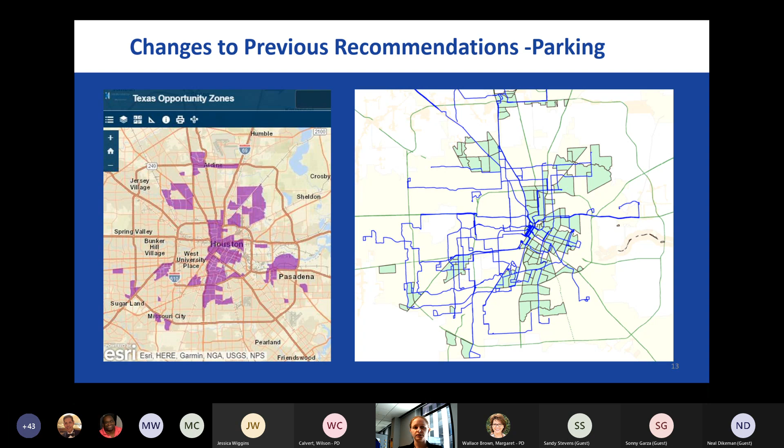The final proposed recommendation change is a result of last month's discussion on narrow lot developments. For lots less than 40 feet wide, instead of the property size threshold being less than 15,000 square feet and then 15,000 square feet or greater, we recommend changing that to be 15,000 square feet or less and then greater than 15,000 square feet.

Are there any questions before we move to a new topic? Right, so subcommittee, are there questions? Lisa, did you have your hand up?

I did, but it was for a previous topic, so. That's perfectly fine. Yes, no, okay, wasn't that important. Thank you, I apologize, I didn't see your hand raised. So if you want, you can send me an email or we can chat about it if you still have the question. Okay, thanks, all right, great. Thank you, again, apologies, I didn't see your hand up.

All right, again subcommittee members, are there any questions on what you've seen so far? Again, all of this has been presented to you and actually was done based on your recommendations. And as you can see, they are, and I think Tammy, you'll agree, they're mostly technical and verbiage more than anything else.

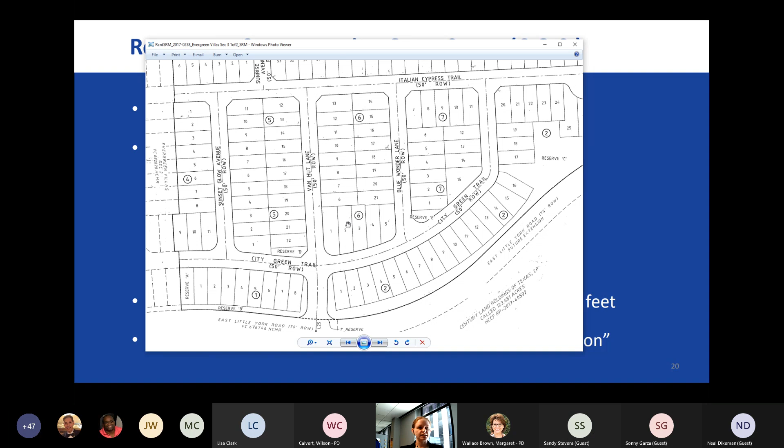So there are ways to incorporate it within the plat. It's just designing it. Does that make sense?

It does. I guess I'm concerned that it sounds like the fix you're describing may make them have to do it twice if they still need that buffer for that type of lot, and is not just switching it from point A to point B, but might increase or reduce the density effectively for what sounds like just bad design choices.

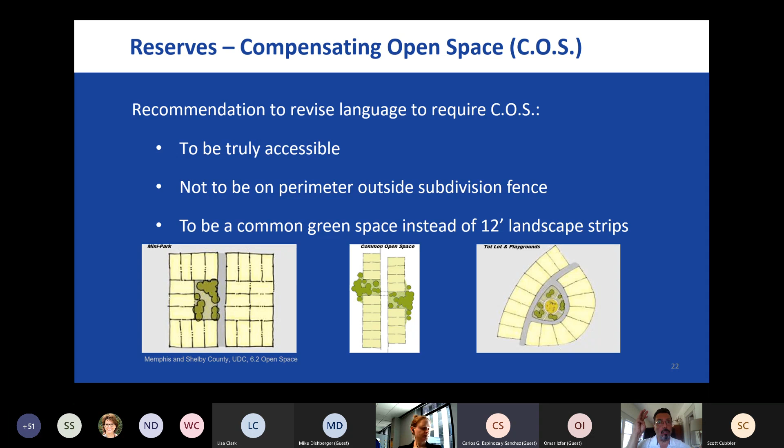All right, so my question is, for that slide where we see the exterior strip and there's no amenities whatsoever—do we marry those two things together? They're not currently married together, but do we marry those two things together?

So let me go ahead and call Neal—his hand is up again, and we'll start our discussion. Neal, go right ahead, sir. So I'd really like to understand what problem we're trying to solve with this adjustment.

It seems to me that if you're trying to create a community integrated to itself, it'd be great to have this compensating open space on the interior. If you're trying to either buffer communities and create communities within communities, or integrate communities together, then it would be great to have the open space on the exterior. I'm not sure why we should be trying to legislate that, unless there's a specific issue you're trying to address with this rule change, or is this just thinking through what might be good? Tammy, I know you have an answer for that.

So we're trying to get back to the intent of COS. When you're reducing your lot size, you're taking away green space from a single resident, and so to compensate, you provide a common green space that can be used in lieu of having that space on your own lot. It's compensating for the open space that should have been on the lot — not that it should have been there, but that to reduce your lot size without restricting density, you now potentially have less yard space personally. So you're providing it within the public space for that subdivision to compensate. It should be truly usable green space for residents with reduced lot size, not just a landscape buffer. Landscape buffers are absolutely fine if that's the design intent, but that's not the intent of COS. Does that make sense, Neal?

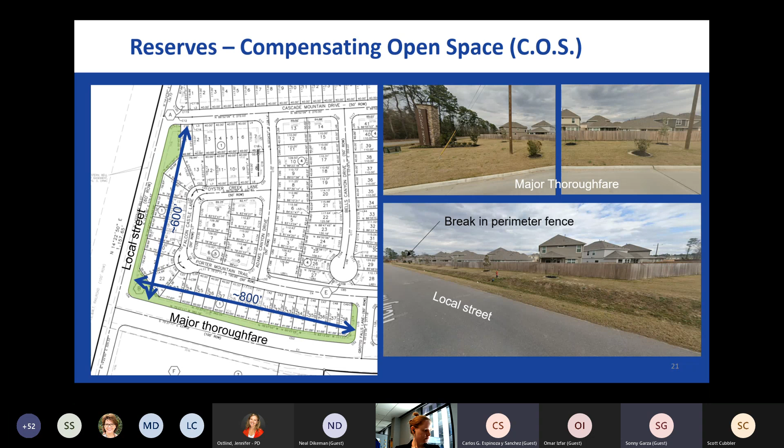There's a good conversation happening here. I wanted to pitch in about the reasoning this is on the discussion list today. COS, compensating open space, is an option for reduction in lot sizes, and as Tammy explained, it is allowed in the city limits and in the ETJ.

But in the city limits you have an option to do density, so most often we don't see the use of COS there. We do see the use of COS outside the city limits in the ETJ, where the option of density is not available. The intent of the ordinance was to provide a common open space which was to remain dry and flat and be used by the entire subdivision being created.

We have seen multiple variances at the Planning Commission regarding the accessibility of COS. So what Omar just mentioned, I think for us at the end of the day, we need to write some standards—maybe distance requirements and minimum size requirements. The size requirement is there, but maybe we can get better at it, and the distance requirement is important because we've seen multiple variances at the Planning Commission, which is why this is on the list—it should be located where it is reasonably accessible.

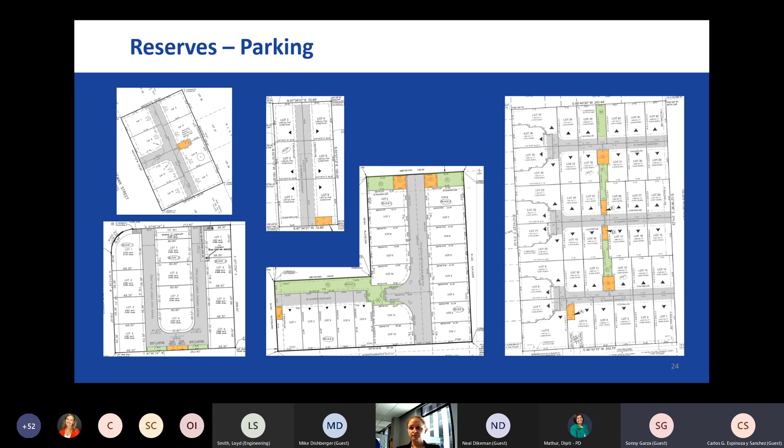All right, anyone else? All right, Tammy, you have your marching orders. Okay, the next section then. The last reserve type was the parking. Yes, this was for 6 units and more, where the ordinance currently requires that they provide parking, and the question is where is it. So you were saying X amount of distance from the right-of-way, I believe. That's where Mike had some notes. I guess it's the last slide you showed on this section. No, the one before that. That one. So do we want to walk through these one at a time and take comments, or shall we just open the floor for comments from the subcommittee?

All right, what was the minimum distance on this slide, Tammy, from the right-of-way? We were just saying not located immediately adjacent to. Okay, there wasn't a hard number there. No, sir. Okay. All right, ladies and gentlemen, questions on reserves parking?

Yes, I have one. Mr. Smith, go right ahead please. So Tammy, help me understand the nuisance or the problem we're trying to solve here. The visitors here would be backing out into a local street. There's 2 or 3 spaces. If they turn over once an hour, you're talking about 2 or 3 cars backing out once in a while, which is a very different thing from every vehicle in this larger subdivision having to back out. What challenge are we trying to solve here by this requirement?

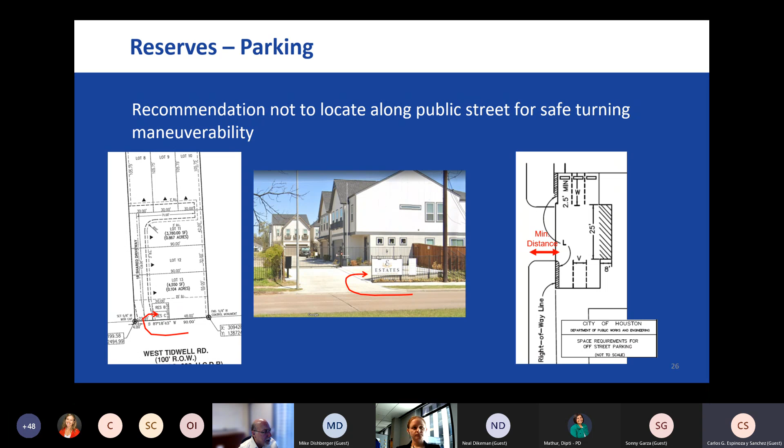Okay, I'll just observe that the example you gave is a divided street where the one-way U-turn issue particularly applies. That's one very small subset of public streets. So I'm not sure I understand that the concern would apply to every public street, as opposed to either certain classifications of streets or certain geometric configurations, like being divided with one-way traffic. So give some further thought as to how one might address that, either through differential distance requirements or through a different definition of public street, moving to something that's less all-inclusive.

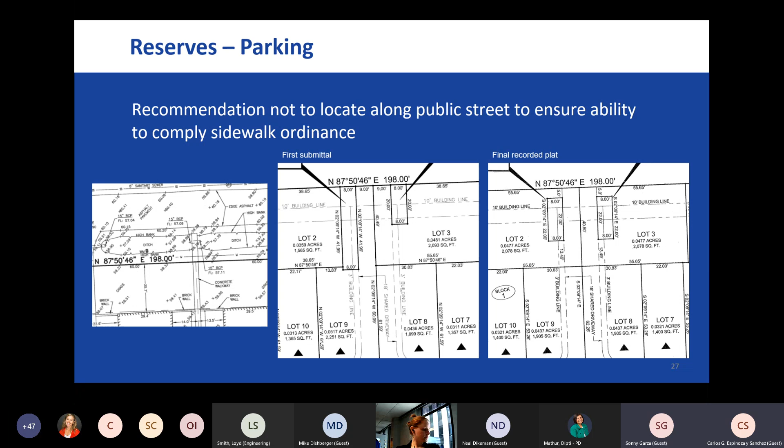Yes sir. Okay, anyone else? Thank you, Mr. Smith, appreciate it. Thank you, anyone else? All right, Tammy, is that all of it? That is all of the reserves, and then we have some other changes. Right, okay, so before we go there, last chance ladies and gentlemen to ask a question, make a comment, ask for something specific, because we want Tammy to be able to come back to the next meeting with the hard data that you've asked for. All right, I'm not seeing any hands raised, so let's go on then, Tammy.

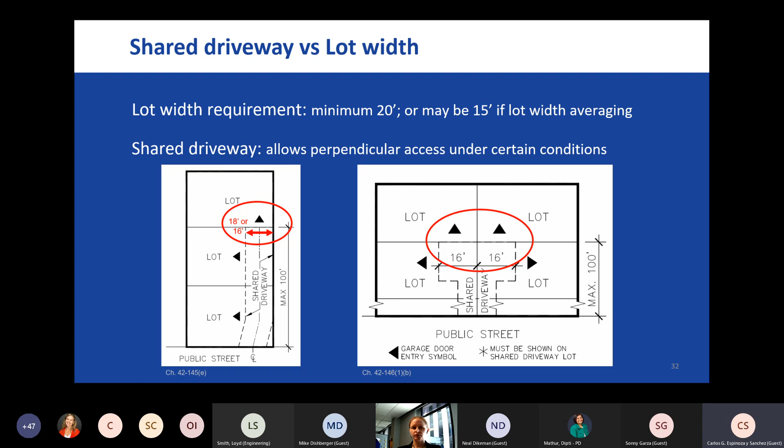Staff recommends adding an allowance in the ordinance to allow a reduced lot width frontage when these two very specific cases are being met. We are not proposing any changes to the shared driveway part of the ordinance. Are there any questions about that?

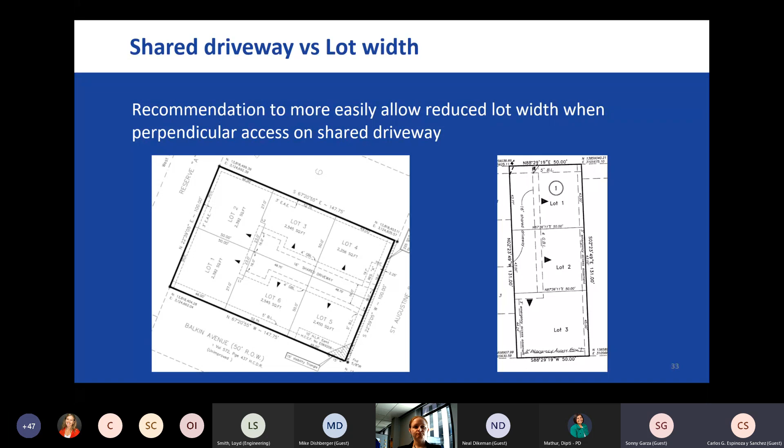Questions? Ladies and gentlemen, I see no questions. Comments? Does this all make sense to everyone? Okay, let's move forward, Tammy.

Okay, so I'll now invite Lynn Henson to discuss proposed technical amendments to the special minimum lot size and special minimum building line portions of the ordinance. Thank you. Lynn, are you there? Yes, I'm here. Go right ahead, please.

Committee members, within the special minimum building line and special minimum lot size ordinances, we do have some proposed technical amendments. They are minor wording changes that will help make the language more consistent within the ordinance and clarify certain instances. I want to reiterate that these technical amendments will not change in any way the intent of the ordinance, and it will not change the application criteria, the analysis, the process, or the restrictions in the ordinance.